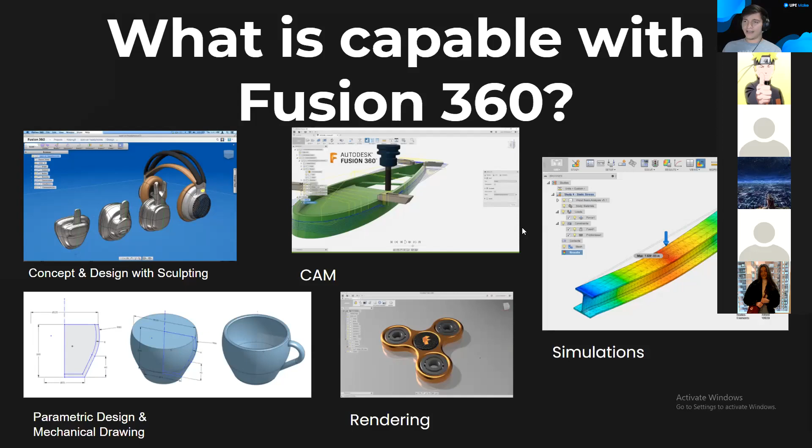But what we'll be learning today is the basics of Fusion 360. We're going to learn how to navigate the software. We're going to get some experience creating conceptual designs. And if we have time, we'll try to see if we can make an animation out of it, so you can see how you could create these animations, whether it's a prototype you're trying to show a company or a startup or things like that.

And as well, if you've ever wanted to learn how to export it to your 3D printing software, you'll be able to learn that as well. That's not too hard, it's basically just pressing a few buttons.

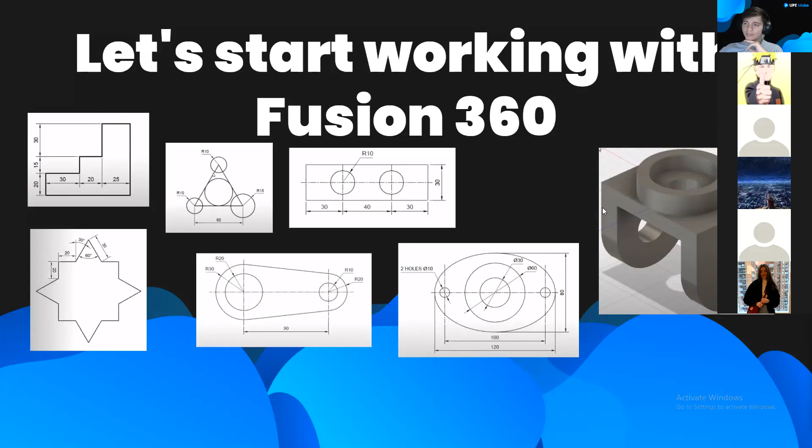But let's start working with Fusion. These are the different sketches we're going to make, and ultimately this will be the final sketch. We're also going to create a cylinder that could go through this little chamber, and we're going to see some really cool movement we could get out of the models.

For the first sketch, I do realize these pictures are not the best quality—I thought for whatever reason they were good when I was creating the workshop. I'll be sharing this PowerPoint document with you, so I'll fix these pictures so you could follow along through it if you want to refer back.

So let's go ahead and open up Fusion 360, and we're going to open up our first sketch.

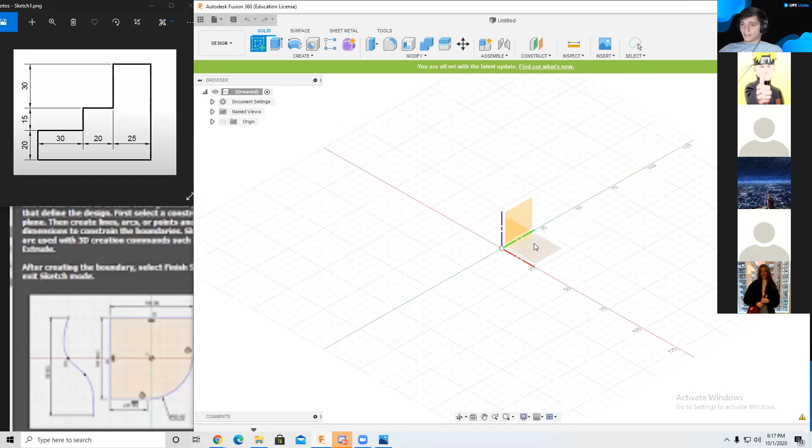What we are going to do first, before starting on the sketch, is play around with Fusion 360 and get a little comfortable with the different tools we have, as well as the navigation, so you could get a sense of how it works.

So just to have something to work with, let's go back. Let's go ahead and create a sketch. We're going to click on any of the planes—these planes basically give you your canvas where you're going to create the model and the sketch.

From here, let's go ahead and create a line and just put it anywhere—it doesn't really matter at this point. We're going to keep this one straight because I want to talk a little about the constraints. A cool feature with the line tool is that if you click on it and hold, it will create an arc. You could put this arc wherever; we're just going to hold it and put it back to the point we started with.

Before we go any further, let's review some of the navigation so you guys know what you're doing. So right now, if you hold your shift button and then your mouse button, you'll be able to orbit around the sketch.

It looks a little bit disorientating because it isn't a 3D model, but just so that you guys could see the different functions as well.

If you just hold the mouse button, you could pan and move the plane you're working with, and zoom in or out. The view cube does the same thing, so if you're not comfortable using the mouse button, you could always refer back to the view cube.

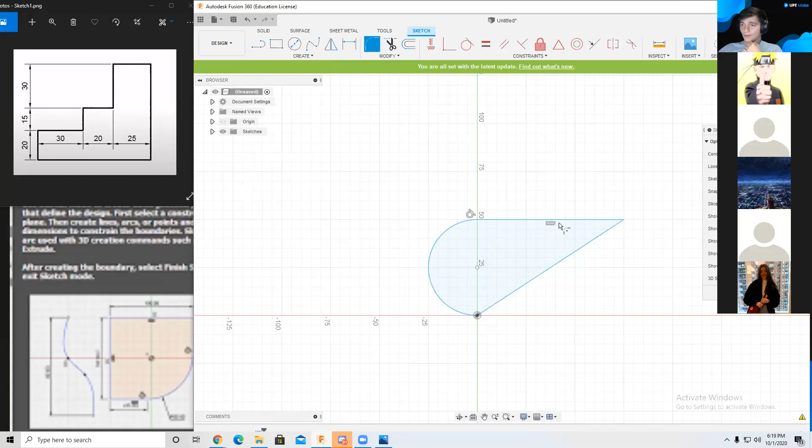You also have your modify tools if you want to make a fillet. If you want to fillet two lines and create a curve, you'd click on these two and it will create that curve for you. You could click on that arrow and it will show you the different measurements of the fillet you can create.

You also have your trim if you want to cut some lines off or erase them, and your offset if you want to copy what you've selected but change something within it, maybe make the arc a little smaller while still keeping the original one.

For your constraints, you have horizontal and vertical, like I said, the horizontal constraint. You also have coincident, where wherever you have a point, you can fix it to a line or another point within your sketch. And you have equal, if you want two lines to be equal - we'll showcase that here.

First, go ahead and click anywhere on the canvas and make a line. Whenever you make a line and want it to end, you could click the green button, or click escape on your keyboard.

From there, let's say we want to create a tangent between that line and this curve here. You would click on tangent, click on the line, and then click on the arc, and it will create that tangent for you.

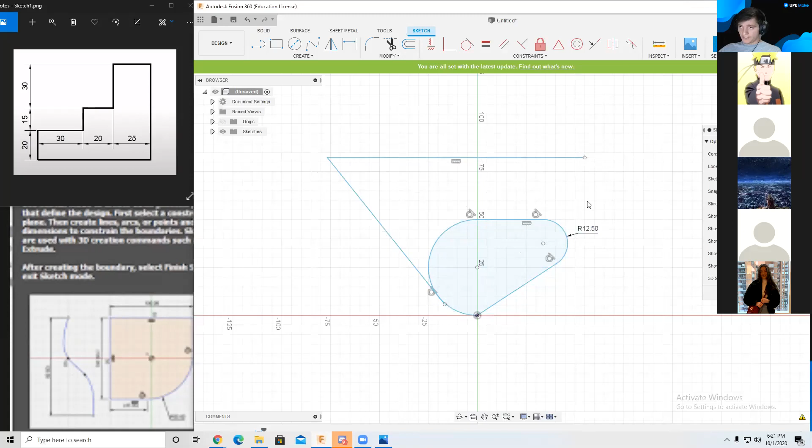From there on, you can't move this line anywhere. Now, if we want to create another line, let's click on that point and go all the way to the right. We could obviously see that these lines are not the same distance.

So if you want to make them the same distance, you click on the equal button and then click on the one you want to copy the distance from. In this case, we're going to copy this one to this one, and as you can see now, they're the same distance.

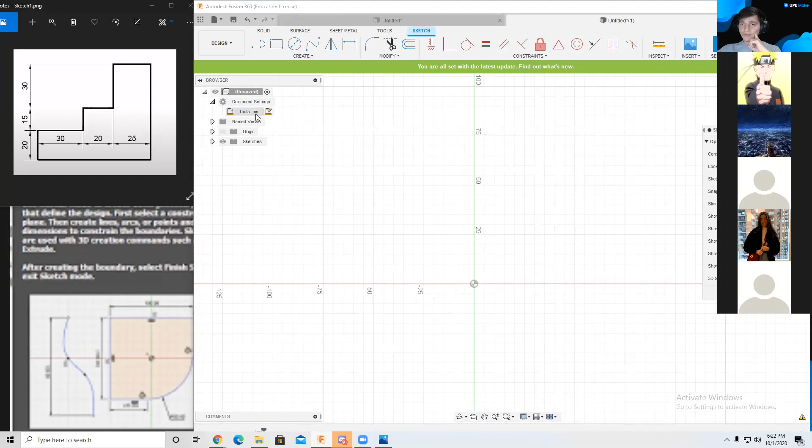If you click on document settings and it says inches, which I believe it does by default, go ahead and change active units and click on millimeters and set that to your default so that every time we create a new design, it's already going to be at millimeters and not inches. Okay, so it's pretty simple.

To start off, you're just going to use the line tool and we're going to create the general shape of what we're trying to create here. So we're going to go there, create that line, create the right line, and again we're just going to create the general shape. Measurements at this point don't matter. We'll go back and fix that after.

Now that we have the general shape, something to mention is that whenever you're dealing with dimensions, it's better to start off from where you began the lines, because sometimes when you try to change the dimension of, for example, this line right here, they'll go out and then they won't connect to the initial one anymore.

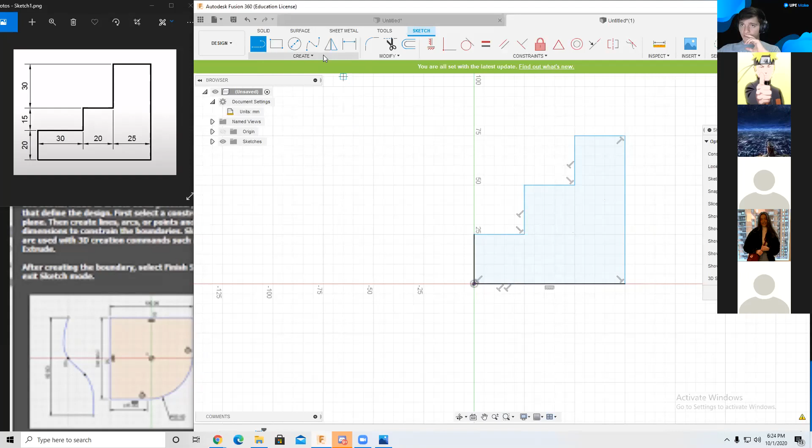So the tool we're going to use to create those dimensions with each sketch is the sketch dimension. You could use the shortcut of the D button on your keyboard, which is very helpful since we're going to be using it a lot this workshop. So to practice, if you want, just go ahead and click your D button, and then it should select the sketch dimension.

On the bottom we have 30 plus 20 plus 25, that's 75. So we're going to go ahead, it's already 75 because I got lucky, but if it's not for you, make sure to put that 75, then press enter. Then we're going to do the right side as well, which is 65. And then this side, 25 — looks like I'm getting lucky with these. This is going to be 20, and then this is going to be 30. If it's 30 already, then you're good.

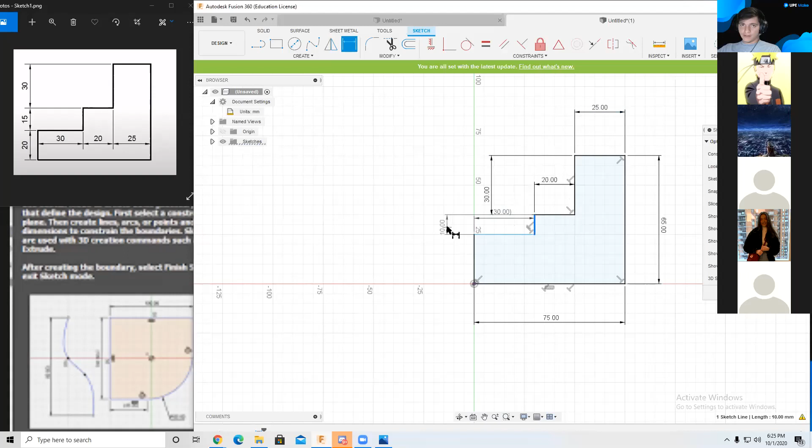And then we're going to do the left sides. So this is going to be 30, and this is going to be 15, and then this is going to be 20. Perfect, so now we created the sketch.

Now what can we do with this? One of the tools you use a lot in 3D modeling is the extrude method or function. This basically allows you to create the objects that you want to create. By clicking on that and clicking on the sketch or the face, you'll receive a menu showing the profile, where you're going to start from, the direction you're going to go, and the distance. In this case we're creating something, so it's going to be one-sided, and it's going to be the distance that we choose it to be.

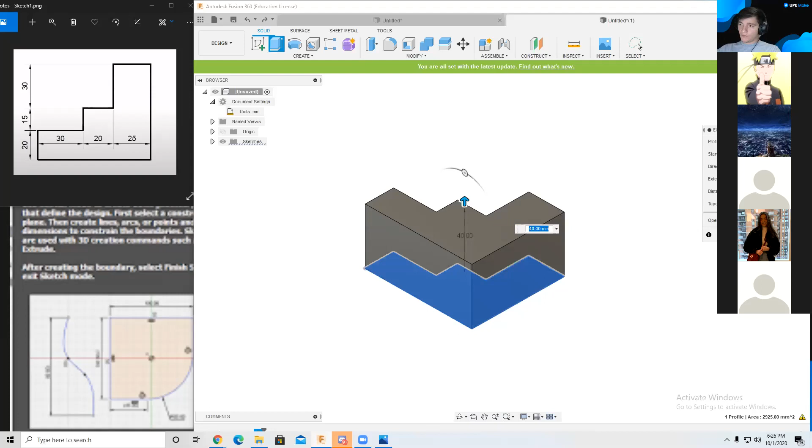We could go ahead and put it to 40 right now, just to show how that works. Before I continue though, let me go over the operations of the extrude. With extrude you get a few operations. The join, which means that whenever you're creating a new object from a sketch on top of an object that already exists, you're going to be merging those two objects together. Those are usually called bodies, but they can also be components. As you can see here, we also have bodies and components.

Before I get to those, let me explain cut. What cut does is basically create a hole in the model you're creating. And intersect — if you have an intersection between two models, it's going to either create that intersection or remove it.

But for now we're going to just go ahead and click on new body. What this is going to do is create a new body or an object that has its own plane. And that's the difference between bodies and components: components each have their own plane, bodies share a plane.

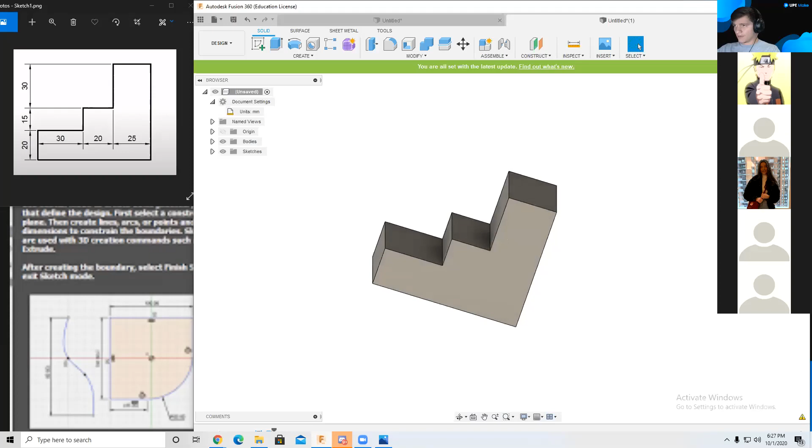So whenever you're trying to create objects or a model that has different parts that move, most of the time you're going to want to use a component, because each object has its own plane — it's a little bit confusing. Once we get to the workshop or to the different sketches, you'll understand a little bit more of what I'm talking about. But now that we have this, let's just go ahead and create another sketch so we could get a better idea of how that extrude works.

We're going to click on the centered diameter circle, click anywhere on that plane of the object that we created, and then we're going to finish the sketch.

We're going to create another extrude, and then where we created that sketch, we're going to show you these different operations. So if I create a body, on my left hierarchy, if I click on the bodies folder, it's going to show me those two bodies. So they're not really connected completely.

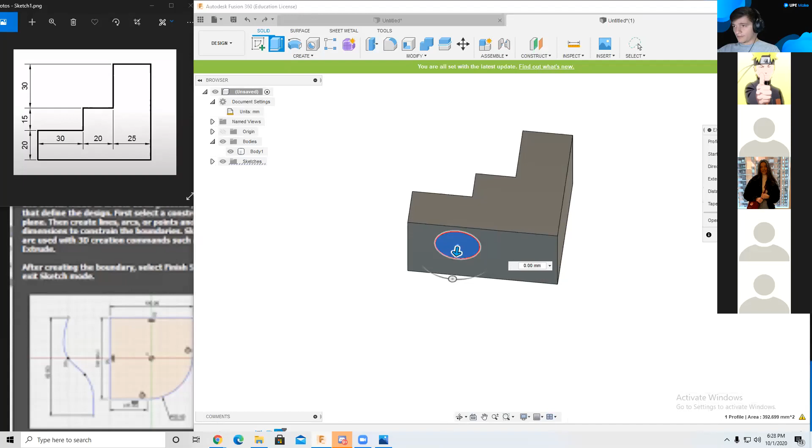They would be connected if I were to use the join operation. So now if I were to click on the join operation, there would indeed be only one body, and I wouldn't be able to separate these two objects.

And then the other thing, other than that, is the components. So for the component, like I said, they get their own plane. This allows me to move this out of the way. But as you can see, I can't move this one. The reason I can't move this one is because this is a body. Bodies have a lot more structure to them, which could be a good thing and a bad thing depending on what you're trying to do.

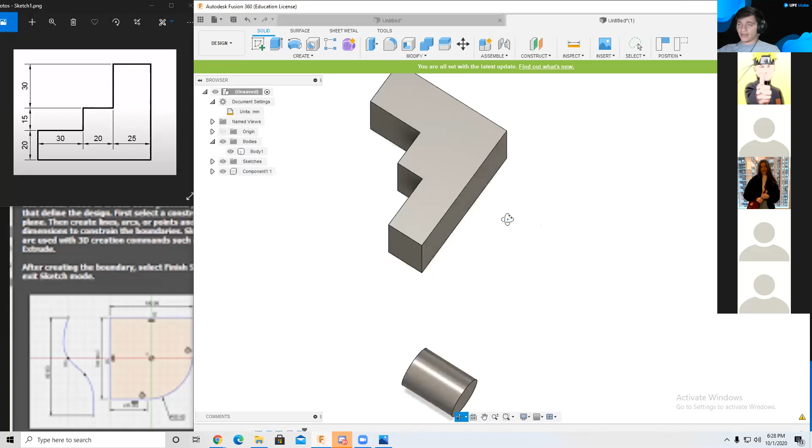In this case, the model that we created is basically stairs. Maybe let's say you were creating a tech deck park, and then you needed some stairs for your skateboard. That would be a way to do that. All right, so that's the first sketch.

Let's go ahead and click on new design. Let's go on to the second sketch. The second sketch is a little bit more complex. We're going to be creating a sort of star. We're going to be using the mirror functions, as well as creating dimensions of angles so you can get some practice with that. The way we're going to create the mirror is by making the top left section of this model, then using horizontal and vertical lines to mirror those over.

Starting off, we're going to use the line tool. We're going to click on the horizontal axis, and then we're just going to copy the general shape of that sketch. Make sure you do not get these two blue lines under these two lines as well, because that's going to create a constraint that we don't want, since we're not going to be able to give it the angle we want it to have. So just make sure it goes a little bit up, and then you can go ahead and click on the green button there.

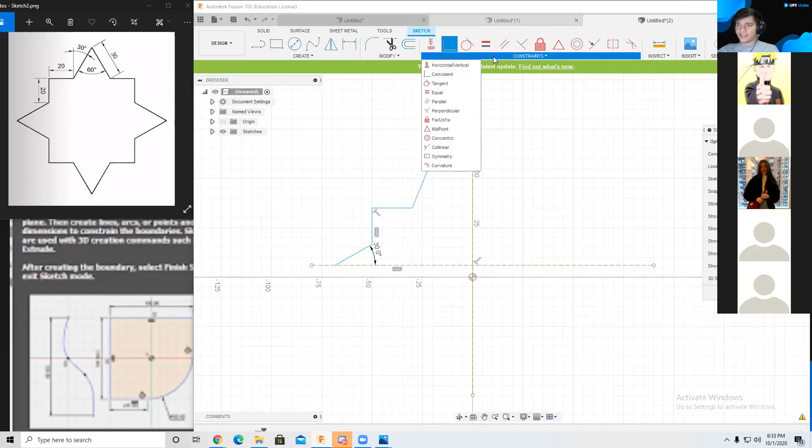Let's see if maybe some of you know how I would go about doing that. Yeah, it's not. So then what tool can we use again to put that construction line back on the axis? Coincide again? Constraint? It would be coincide again, yeah. So then for the coincide, we would just click on the line and then put it back on this point that is the axis.

And then how did you get that angle again? I'm sorry, the 30 degrees. Yeah, no worries. Click on sketch dimension, and we're gonna click on the line that we're trying to get the angle with, and the axis. Awesome, we're gonna click. Yeah, no worries.

So from there, now we have. We're gonna go ahead and give these two sides the length that they have here on the sketch, which is 20 and 20. So we're going to give that a length of 20, and this one also a length of 20.

Now we can't really give this an angle, so we're also going to use that coincide to move this back over here. Again, it moves the construction line, so we're going to do the same thing that we did and move it to the axis.

Now that we have it where we want it, we'll give those two lines that angle of 30. Did it give it? Yeah, it did. Okay, perfect. So now we got 1/4 of the design.

So now we're gonna go ahead and use the mirror tool to mirror that over to all the sides that we need it to go. So we're gonna click on the object that we're using. In this case, is these 4 lines, which are the objects, and then the mirror line is gonna be the one on the vertical axis. It's gonna mirror it over. We're gonna click OK, and then we're gonna do the same thing, but over the horizontal axis.

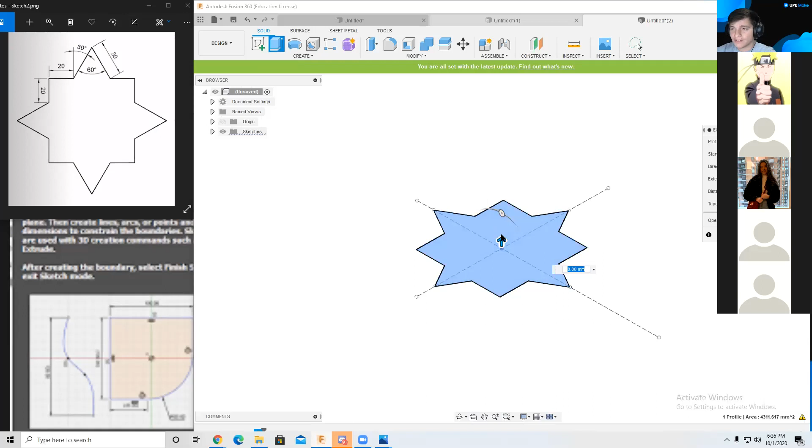So let's go ahead and extrude that. We'll give it some 20 millimeters. We'll create a new body because in this case, we're not using any other parts.

And then we're gonna use a fillet. The fillet makes it so all the edges around the object that we're using are smooth. So instead of clicking on every single line, in which case, some cases you are gonna have to do that, in this case, we could just click on the face and they'll do that for us. And then we could use this arrow key to kind of see where we want it to be, or you could also give it the radius that you want.

We're gonna go ahead and put a 7.5 millimeter on that. Click OK, and then we're gonna do the same to the other side. So we're gonna click the face after we click fillet, and then we're gonna give it a 7.5, and then click OK. So now we got pretty cool something.

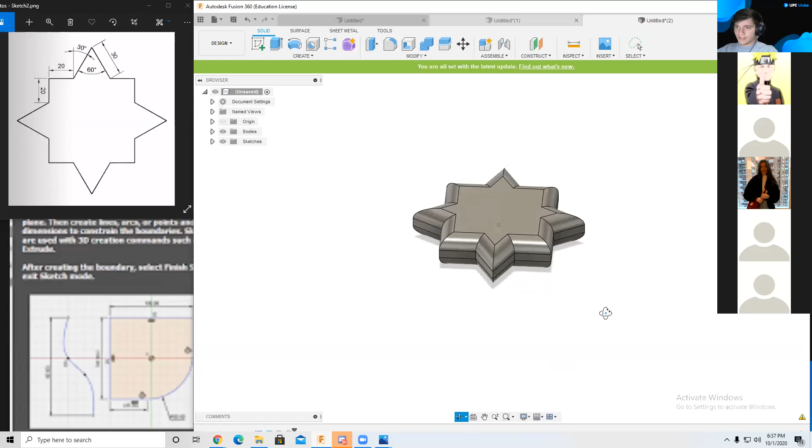But if we're trying to make a bracelet, then we're going to have to make a hole in the middle. And I would want to ask you guys which tool to use, but it's obviously going to be the one that says hole. So you're going to click on that hole feature.

You're going to click on the middle of the face, and we want to make sure that it is in the middle, so it should snap to the middle. Just make sure that it does go there, and then from there we could give it a little bit more dimension or diameter. But we don't want to go too far off, because then we're going to start getting errors due to the structural unsoundness of this design. So we'll just do 40 millimeters and click OK, and it'll make that hole within the model.

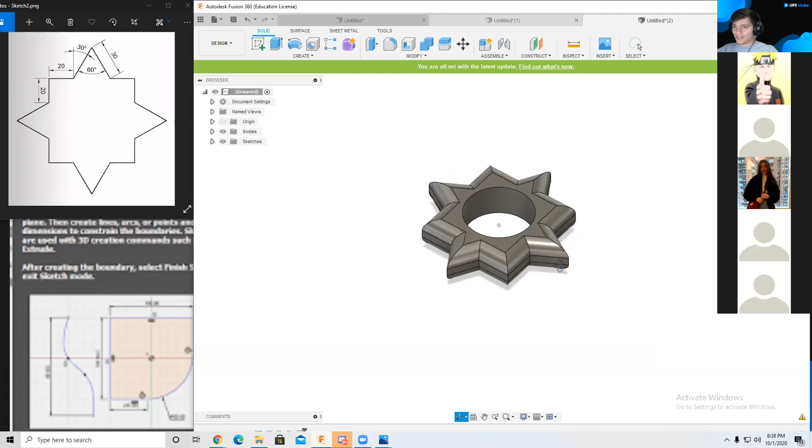But we wouldn't want to put that on our wrist if it has those sharp edges. So we could again use the fillet, or we could also use the chamfer, which is similar to the fillet, only with a straighter edge. We click on the two circles, click on that chamfer, and then we can use the arrow as well as give it the distance that we want.

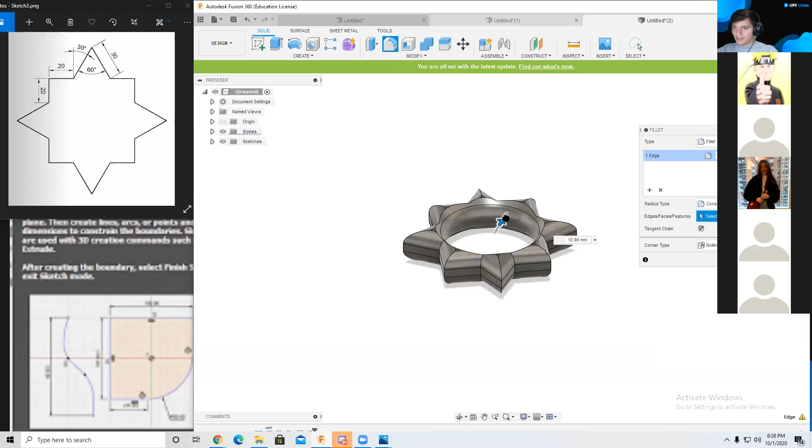Let's look at it. It's good, but I still wouldn't want to put that on my wrist. So we could click OK, and then we could probably give that line in the middle a fillet. And now it looks like something that we could use. So if you're into cosplay and you need to make some sort of bracelet like this that your character uses, this is a way that you could do it.

Cool, so that was the second sketch. Let's go ahead and start on the third sketch.

Hi, sorry, was there a way that you could make the hole not be a circle? Yeah, you just wouldn't use the hole option.

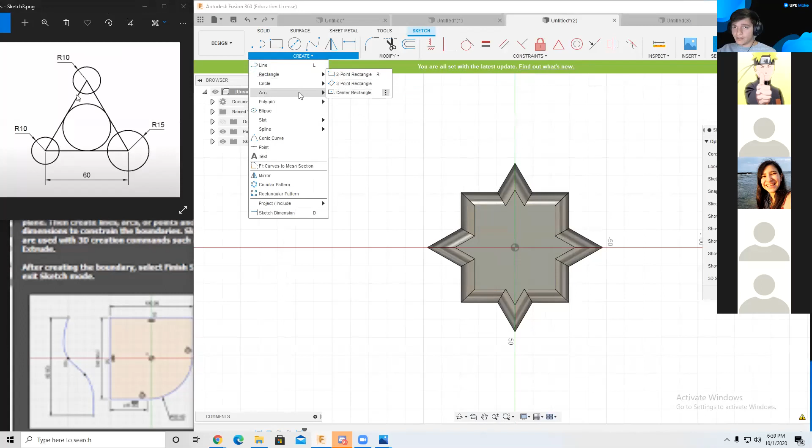You would just create a sketch on top of the face of the object and create whatever shape it is that you want to make. So you would click on create sketch and click on the face where you want to make the shape. Then, depending on what shape that is, you would go here, maybe a rectangle or a circle. If you want to make a triangle, then you would use the line tools and make that triangle yourself. Then just finish the sketch and extrude that out.

So once that's done—it would be the same thing if I wanted to do the shape that we just did, right? Oh, that shape? Yes, yeah, so I think you could actually extrude that with the shape that you already have there. You wouldn't have to make a sketch—you could just click on extrude and click there, and it would make it for you.

So as long as you see edges wherever your model is, you could do a lot of things with those shapes that are already created. Cool, thank you. No problem.

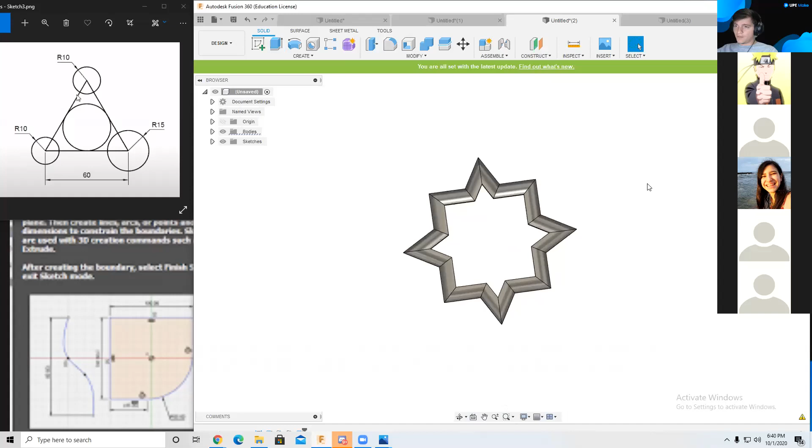Okay, so now for the next sketch, we're going to be creating an equilateral triangle with an incircle inside of it. So again, we're going to create a sketch, use the same plane that we've been using or any other plane, and we're going to use the line tool to create that triangle.

So we could start at the middle and then go to the right, then make sure that it meets in the middle and connect back to the first point. For this, since we want to create an equilateral triangle, we want to have the angle between two of the lines to be 60 degrees, because that's what creates an equilateral triangle.

So we're going to click on D, the sketch dimension shortcut, click on the two lines that we want to create an angle from, and give them 60. Now we want to make sure that the distance of this triangle is 60 as well, so we're going to make it a little bit bigger. From there, now that we have all the lines blacked out, it means we have a fully constrained shape.

We're going to go ahead and make those circles that we have here. As you can see, they say R10, R10, R15—those are the radiuses. But the way Fusion works, we give it the diameter. So in this case, for the bottom left, we're going to go ahead and give it 20.

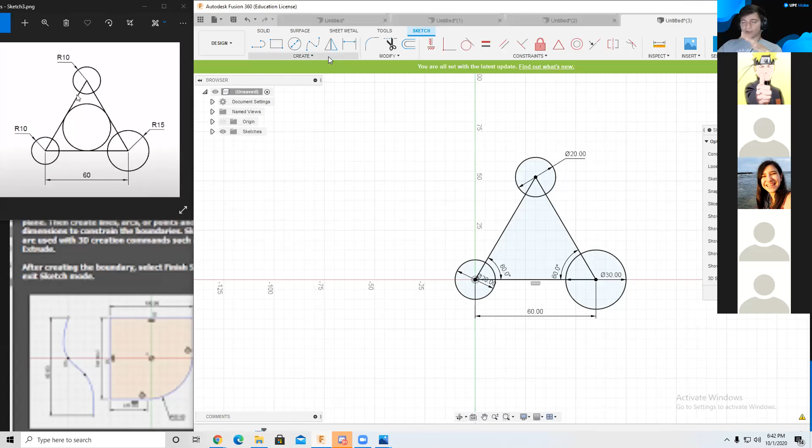So another question for you guys. We have this circle inside the triangle, and we want it to be touching every point of that triangle. I'm not going to show it so you can look at it inside your own Fusion. What tool or create function would we use to have that in the middle? You want to use some tool that creates a circle touching these three points. If you look at the circles available, which one would it be?

No idea? Okay, would it be like the conjoined one, so we want tangent? Yeah, I think the 3 tangent would work. Also the 3 point would work. Let's try with the 3 tangent. Yeah, perfect. You got it right.

So now that we have that sketch complete, let's go ahead and see what we could create with this. Oh, I forgot something. Once we have this created, there are lines here that we don't want, because if we keep those lines, it makes it a little more difficult to create that extrusion.

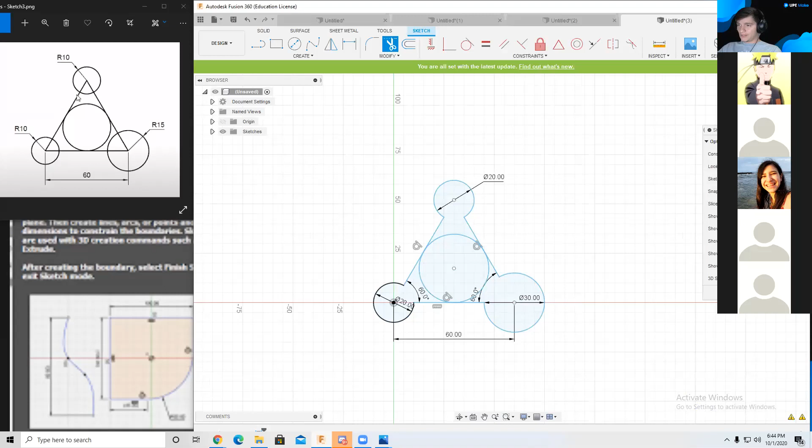So we're going to use the trim tool, or you could use the T key on your keyboard for the trim tool. We're going to trim all the edges that we don't want once we extrude this sketch. We'll keep the circle in the middle, but take away all the lines connecting the circles on the outside. The reason we want to do this, once we finish the sketch after removing those edges, is so we can create an extrusion that doesn't include this middle circle, but includes everything else.

Then we'll click on each one we want to extrude together, and we can create that shape or object. In this case, you could put 15 or 20. I'd say 15, because what I see here is a fidget spinner. The only thing wrong with this fidget spinner is that the walls are a little too short, there's not a lot of structure in there.

But you would do the same, something similar with the circle function. You would just make that circle a little shorter so you have a bit more structure within each side of the triangle.

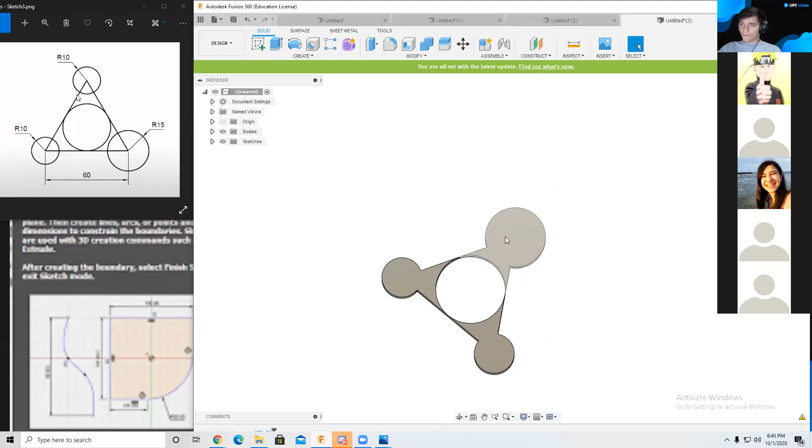I don't know if they have it, but check it out if you're interested. There's this really cool tool called McMaster-Carr. It basically allows you to have access to all these different nuts and screws, because in some cases when you're making different models, you don't want to create this stuff if it's already created. It's just wasting your time if you need to make it yourself. I don't know if they have bearings in here, but if they do, then yeah.

So you could go to McMaster. If you'd be interested in doing something like this, you go to Insert, McMaster-Carr component, and search bearing, or in any case you might want to search screws or nuts if you're trying to create something like that. Where would you go to get that again? Insert, and then Insert McMaster-Carr component. Then it shows you different things you have access to that you could import directly into Fusion 360.

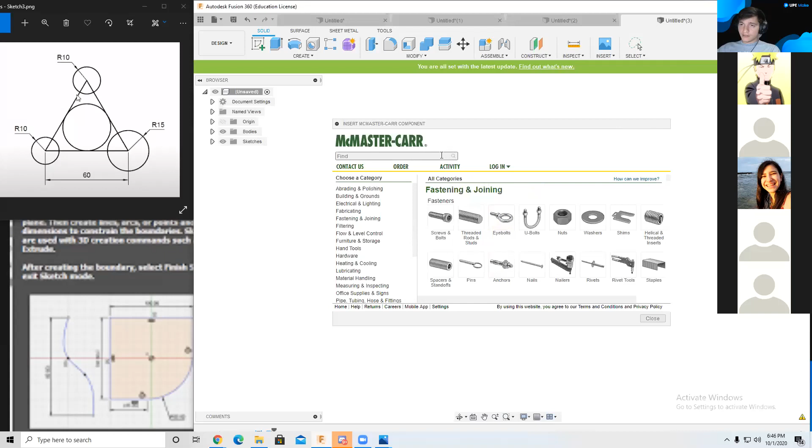In this case, we would use a bearing. I don't know how well this would work because of the size, but I think we could get it to work. Just go to bearings, click on open. Some of these don't have models, some of them do. I don't see any models for this one. But to show you what I mean in terms of importing these different objects, you could click on screws, socket head screw, alloy steel.

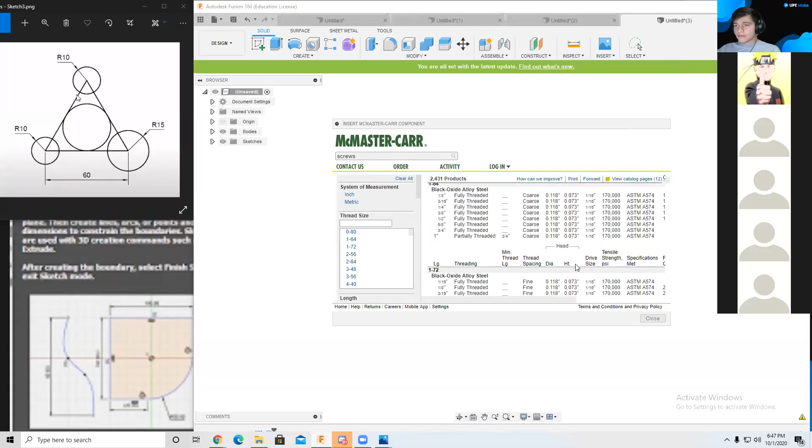And then we'll click on the size that we want. In this case it doesn't really matter, I'm just showing you guys how you could import this. Once you go to the product itself, we would go down. Let me see if I could make this bigger. And then you would click on save.

But first, I've heard from multiple people to always use 3D SAT, which I believe is the format in which it's getting imported into the model. And we have it here.

Then we could scale it if we would like to, with the modify scale. And equally, you would be able to do that with a bearing, but you would have to find what bearing is accessible through that import.

Awesome, so that was sketch 3. Hope you guys are following along.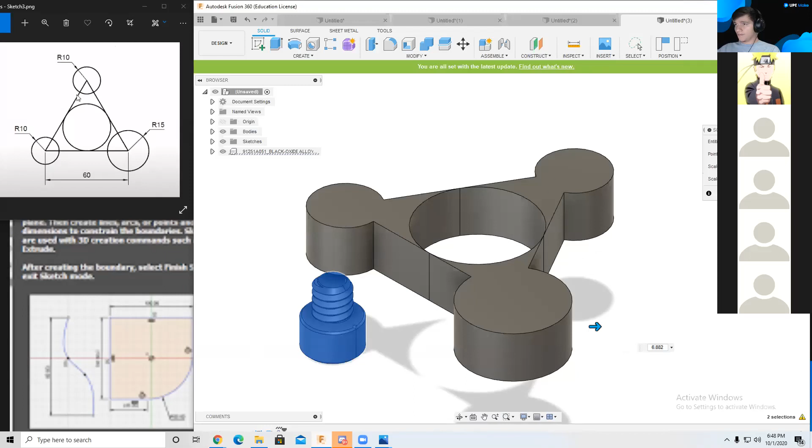If you guys need anything—hi, I got here late, but yeah, no worries. Oh sorry, that was private.

No worries. The way that we're doing this is we're doing it through sketches. So right now we're in the 4th sketch, so we have 3 more sketches and then we have the final sketch.

Just try to follow along, and I'll talk a little bit more in detail so that you could see what you're doing. If you don't have Fusion 360, make sure to download it, okay?

Quick question, you said this recording is going to be posted in the UPE YouTube channel? Yeah, that's correct. Awesome, okay thank you. All right, no worries.

All right, so sketch 4.

For a second I thought that the participant said 72. I'm like, what?

Okay, so this is the fourth sketch. The way that we're gonna go about this, we're gonna create a sketch as well. And then from here, what we're going to do, we're gonna have to first make those construction lines.

So you can see them in the sketch, those dotted lines. We're gonna create that, and the reason we want to create that is because we want to keep that measurement there so that we know where to put our circles.

So we're gonna click on the construction button, click on line, and then make some lines anywhere on the canvas. From there, we're also gonna create a line going through the middle. Click OK, or click create and continue.

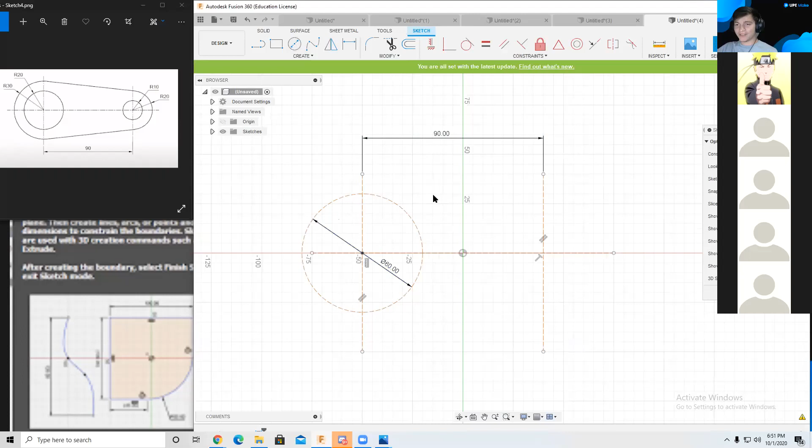Oh, this is a perfect error, so I could explain it to you. I forgot to click on this construction button again, so it made this circle a construction line, which I don't want because then I won't be able to extrude this. So I need to click on this and then click on that construction button here so that it creates a solid line for it. But once I deselect this again, it's going to still be selected, so make sure to turn it off once again so I can continue to create the circle where you need it to be.

I'm going to try to go a little bit quicker. It's only been an hour, but I don't want to keep you guys here too long, especially since I want to go over the 3D pen stuff.

So now we're going to give that a diameter of 40.

And then we're going to go to the right side and create those circles as well. So the outer circle is a diameter of 40 as well, and then the inner circle is going to be a diameter of 20. Because as you can see, it says R10, R20, those are radiuses, or radii, I don't know what you would call it, but.

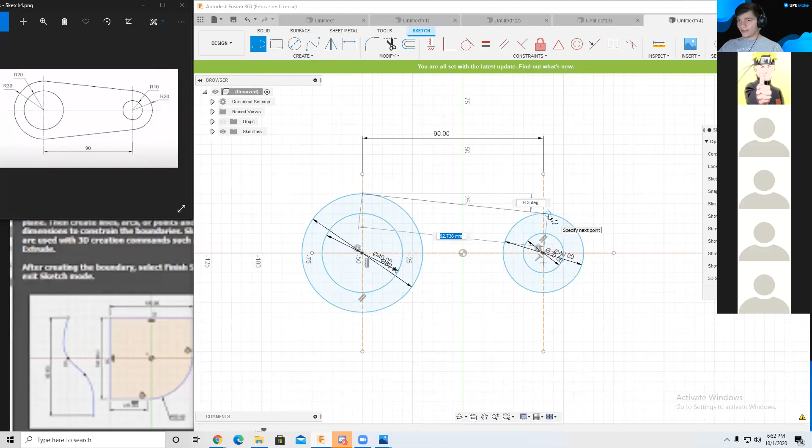So now we're going to create lines that connect these two circles. We could just click on the top right here and connect it here. What I would say is that when you are connecting these lines, make sure that the right side of it shows a tangent icon so that you know that it's getting that constraint. Obviously you don't have that constraint here, but we'll be able to add that constraint later on if we need to.

I might get an issue with this, but I know how to fix it. Click on anywhere on that circle, and make sure it goes to the tangent. Now we're going to give these lines tangents with the circle as well, clicking on the line we want and the tangent we want.

As you can see, I got a failure here. I believe that happens because the point where the line starts intersecting under the circle isn't recognized as a circle we can be tangent with. If that happens, click on it and then click the delete key on your keyboard to remove it. To avoid that, make sure to go a little bit over

that middle part of the circle, and then again put the tangent. Let's see if this works. There, yeah, that was the issue. It's probably going to happen to this one as well. Oh no, it didn't. Okay, perfect.

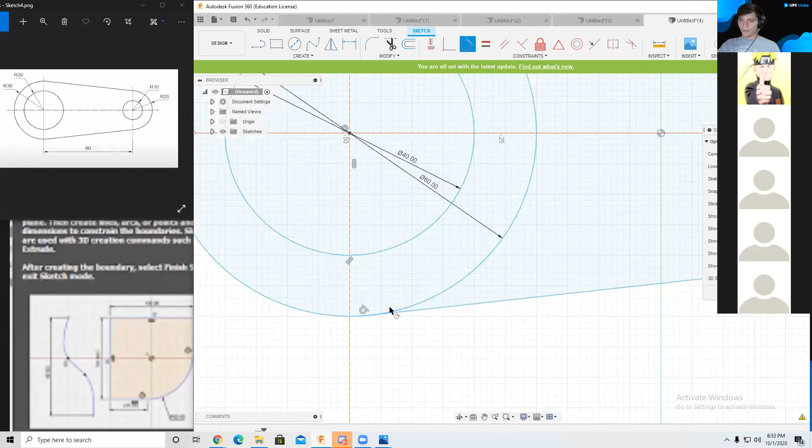The reason we want those tangents is so it's a lot more structured when it comes to removing these lines that we don't want, because as you can see in the model, we remove them. So now we're going to use the trim button and remove those lines from there and there.

One other thing to mention: make sure you zoom in really close on the intersections, because this line here that's separating this doesn't get removed, and that's going to be an issue once we start to extrude this model. Similarly, on the bottom, it's going to have that line we don't want there. Let's check this side as well.

This side is good, and this side is good. Okay, so we got the model.

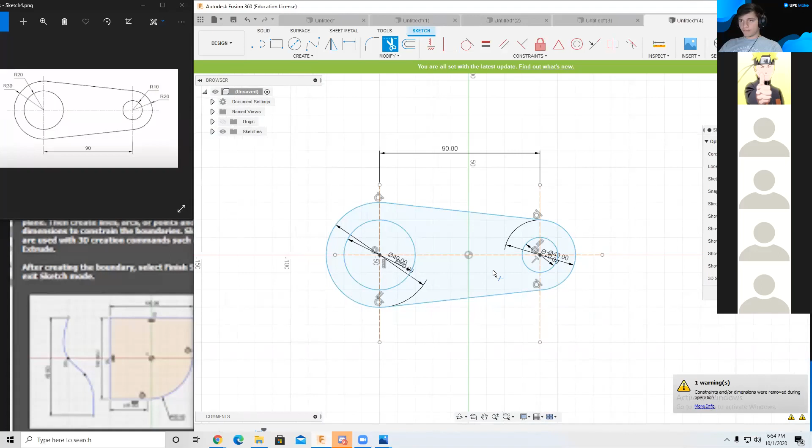Now we're basically done sketching it, so now we could extrude it. We're going to click on extrude, click on the face we want to extrude out, and give it, let's say, 15. And we've created a two-hole clip of some sort.

But what else can we do with this, right? I think we could do a few more things with it. So let's go ahead and create another sketch on top of it. I think there are two things you could make with this.

We're going to click on the line tool and create a line that goes from the smaller circle straight to meet the bigger circle. We're going to make another one on this side.

Since we've created these two lines that separate this part of the model, we'll be able to extrude that out or cut it out. So we're going to click the extrude button and cut this out. We use the operation and click cut, then tell it where to cut, using the arrow key to put it down, making that separation there.

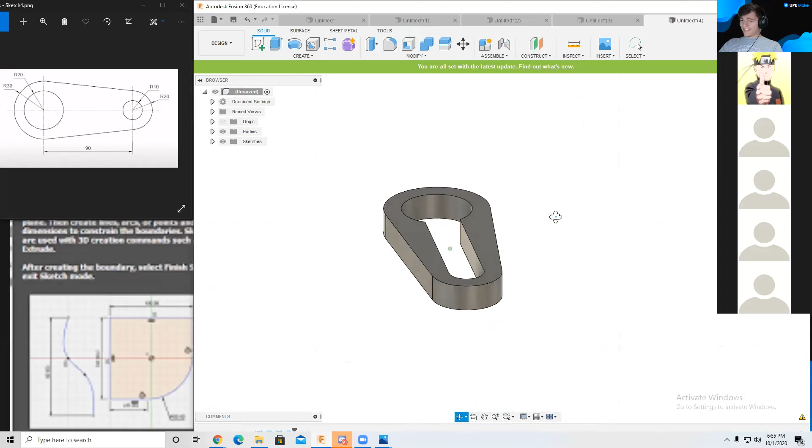Now, I don't know about you guys, but I think this is what they have behind the pictures you're always trying to frame on the wall. So if for whatever reason you lost one on the picture, you could create this in your 3D modeling software and print it out with your printer, or go somewhere. Kind of like a chain on a door too. Oh yeah, that too.

So now let's go back and do Control Z so that we go back to this view. We could also create the starting of what's known as, I think, one of those clip locks.

All right, this will be fine. So we created this sketch as well. I'll be really quick about this because it isn't really a big deal, but we also extrude this out.

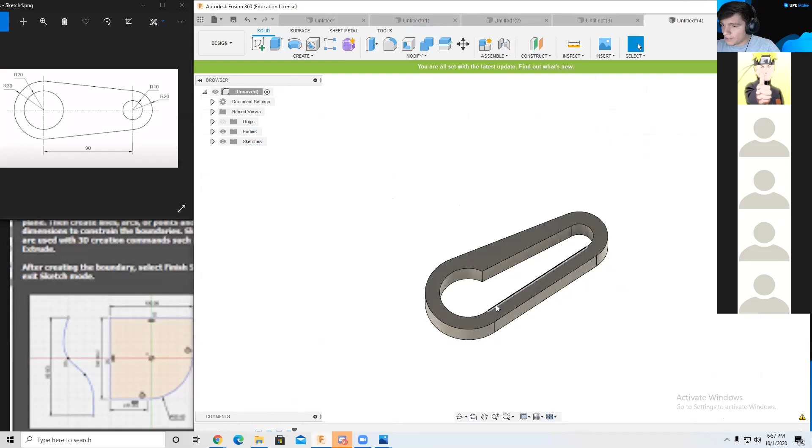Seems to me like the beginning of one of those clips that open and close on one of these sides. You would only have to create that mechanism to open and close it. But you could essentially create that yourself, or develop something like this and be able to

Create it if for whatever reason you want to. Cool, that's sketch 4, let's move on to sketch 5. And then we'll get sketch 6 and then the final sketch. These are a little bit easier, so it won't be too long. A lot of the same processes are for a lot of these sketches, but I wanted to ensure that you

Get comfortable with a lot of the tools here. Because especially for me, whenever it comes to a lot of the workshops that I've gone to, a lot of the content that's shown goes very quickly or very advanced. I think in order for you guys to get a better understanding, having you practice through these sketches makes it a lot more coherent in terms of how to use the software.

So initially we're going to create a rectangle, right? So we're going to create a rectangle, 30 by... was that 180? No, not 180, sorry. 40, 50, 60, 70, 80, 90, 120, right? I think so, whatever. So we create a rectangle at the center.

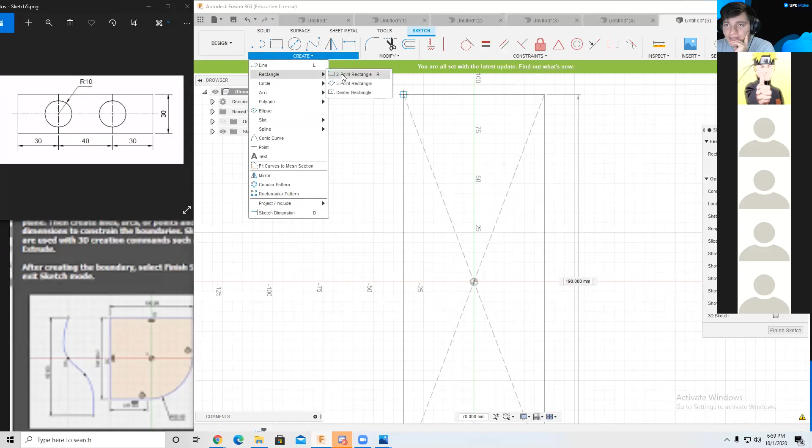Make sure to click on rectangle and then click on center rectangle. We're going to click on that middle part. We're going to create 30. We're going to click tab to go to the other parameter of the dimension. I'm going to give it 120. Oh, it's 100, sorry, I'm stupid.

I'm not stupid, I'm smart, but now we have those dimensions like that. You gotta keep reminding yourself, man. You can't. Gotta keep morale high. Yeah, exactly.

So now that we have the rectangle, we need to make construction lines so that we can make sure that the circles we create are symmetric. We're going to click on the line feature, click on construction, and create them anywhere on the left side, then another one anywhere on the right side. Once we've created those, we use the dimension tool to move those construction lines where we want them to be. In this case, we're going to give it 30 on the left side and 30 on the right side.

So now we have the location where we want the circles. We're going to use the center circle and click on those intersections. Radius is 10, so diameter is going to be 20. Oh, and looks like I made another error, but we'll be able to fix that.

Again, we're going to do it on the right side. But as you can see, these are construction lines, and we don't want that. So we're going to click on one, then click shift and click on the other, and make sure we deselect that construction toggle there. Once we do that, we basically got the sketch that we wanted. But now what can we do?

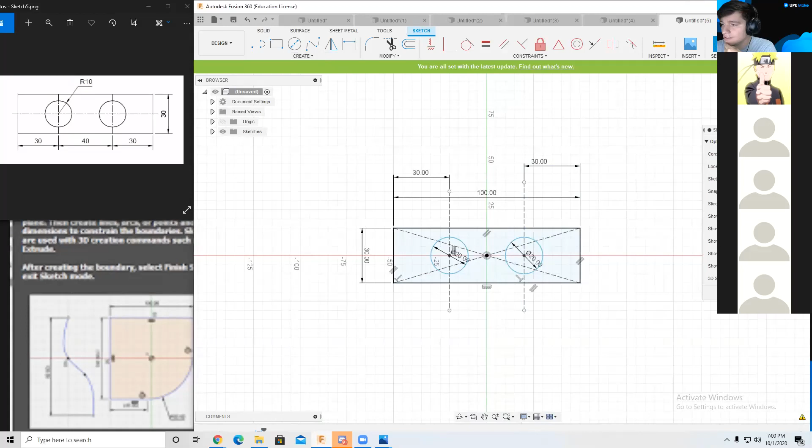So we're going to look at a new feature here, and that's going to be the loft. We're going to finish sketch, go to construction, and create an offset plane. The reason we create an offset plane is because what a loft does, as you could read here, is create a transitional space between two or more sketch profiles.

This is one of the sketch profiles. Since we want to create another sketch profile, we can't use it on this same plane because there's not going to be any distance in between. So then we're going to go to the construct tab, click on offset plane, and then click on the face that we're trying to offset. Once we do that, we can see that it created a plane for us.

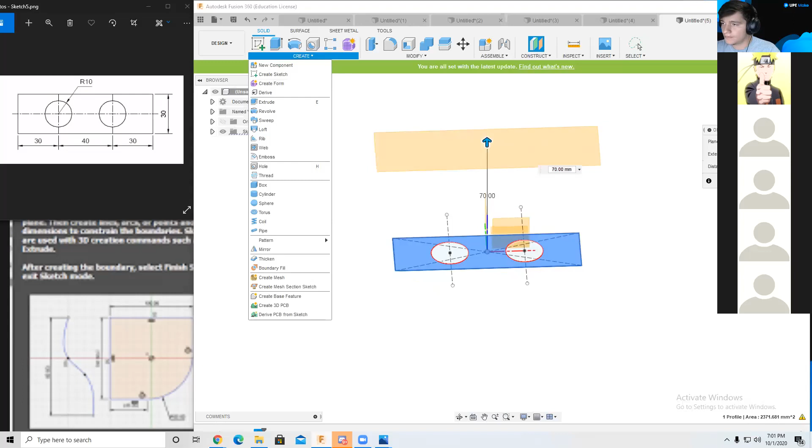We're going to move that up a bit so that once we create that sketch of another rectangle, we're able to create that loft and make that transitional shape. So we created that offset, moved it up a bit. Now we're going to create a sketch on top of that offset plane that we created.

We're going to make another rectangle, a center rectangle. And then we're just going to make it a little bit smaller than the outer rectangle we already have there. So we'll make it 20 by 70, that's fine.

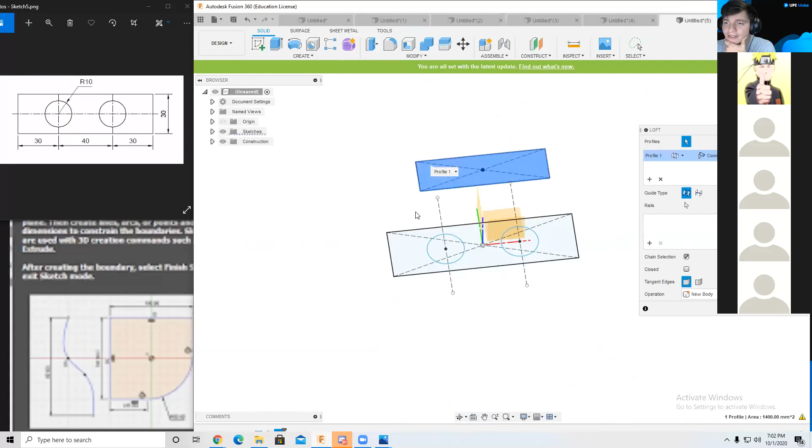So now if I move an orbit, you'll see that there are two planes separated from each other, and that's perfect for the loft. So now that our sketch is complete, we're going to click on finish sketch, then go to create and use the loft function. We're going to click on the two planes that we want to loft, and it's going to create that transitional space we were talking about.

Perfect. But now what? This is just like a block or a rectangular prism. And what happened to our circles? Whenever you create an object, for whatever reason, it makes your sketches go invisible. So to get those sketches back, on the left side click on the sketch folder and make sure the eye icon is on so you can see them.

And then again, we'll just create an extrude and click on both. You could either make a bushing, which is what this looks like, for maybe a door or some part of a car. Or if we were to create a join extrusion on both of these, we created some sort of Lego block. So you could get a sense of whatever your imaginary—whatever your brain could think of—you could basically make it.

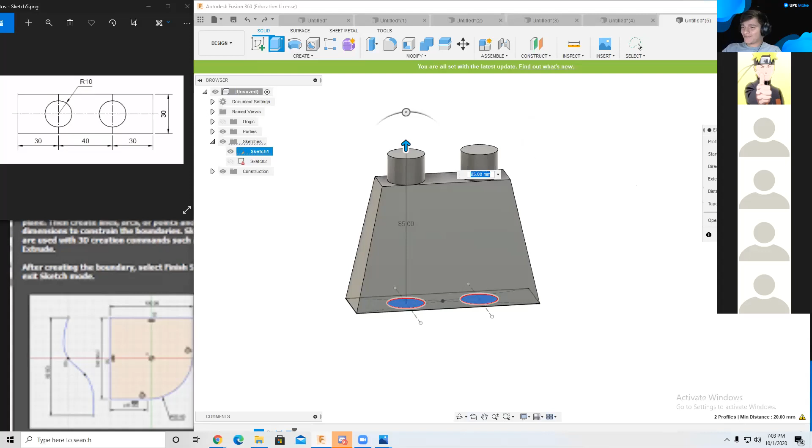So how did you create that shape from the sketches again? You use extrude, I think. The circles, or the way— you join the two planes, like the sketches. Yeah. So were you able to create the two planes? Yeah, I got them both. Okay, so then you go to create, and you click on loft. What loft does is it gets those two planars and creates the shape in between them. So you're going to click on one, and once you click on that option, you click on the other one. Got it, okay, thank you. Yeah, no worries.

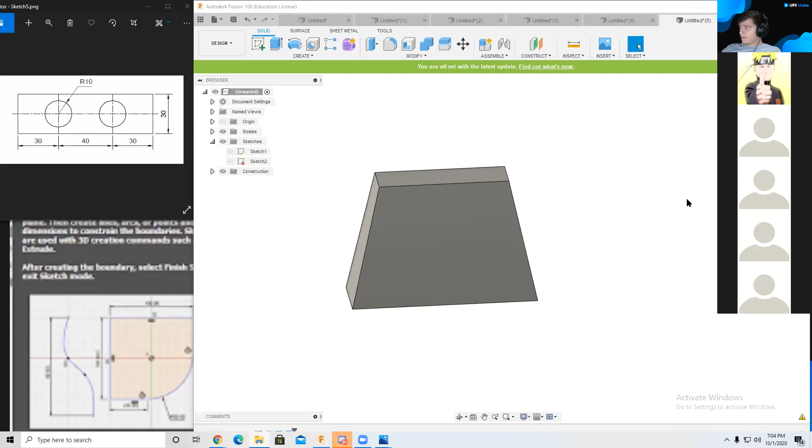All right, that was sketch 5. Again, like I said, you have your circles here. You extrude these and you create what it is that you're trying to create. In this case it would be a bushing.

We have one more sketch, and then the final sketch, and then we will get into the 3D pen. It's going to be a lot more chill once we get into the 3D pen aspect, because I'm going to be showing you guys my camera and me trying to create things like this, and hopefully you guys will be able to do it along with me.

So let's pull up the next sketch, sketch 6. Okay, again, create the sketch plane we're going to work on. In this case, we're going to use an ellipse. So we go to create, click on ellipse, and just click any two sides—we'll fix this after. One thing I did wrong right there: I want it to be in the center. For an ellipse, they're centered, so you start where you want it to be.

Now that we have an ellipse, we're going to make those dimensions what we want according to the image on the left. So the right side is going to be 80. Again, how I did that: you click on sketch dimensions and click on the two points you want to get that length from, and it changes the shape accordingly. Oh, that's not right. Click, click, what's happening? There. And this is 120, perfect.

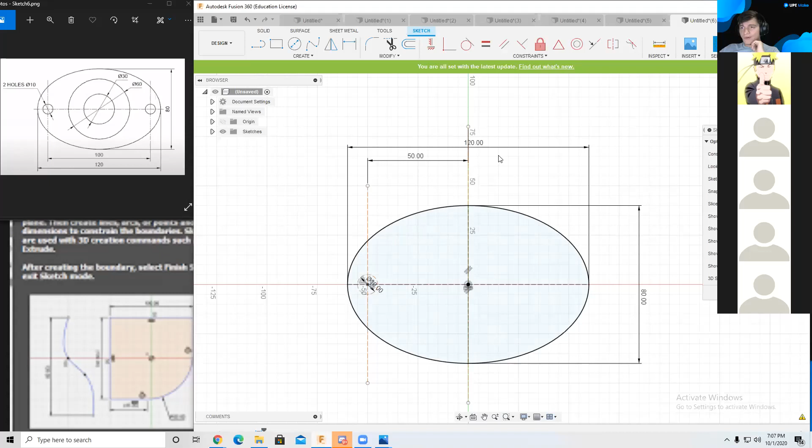So we go to that intersection and create the circle with a diameter of 10. But now we want it on the other side, so we use a mirror, since we have a vertical construction line in the middle. Oh, and again, I made this circle a construction line, which is a very bad habit, so you click on it and deselect that—make sure it doesn't happen again. Now that we create the mirror, we click on the object we're going to mirror over, then the mirror line we're going to use.

And there we go. So now the only thing left is creating the center circles. We're going to use that center circle again, create a diameter of 60, and then create an inner circle within that with a diameter of 30.

And we basically got our sketch, which wasn't too difficult. So now that we got the sketch, again, we'll go ahead and extrude.

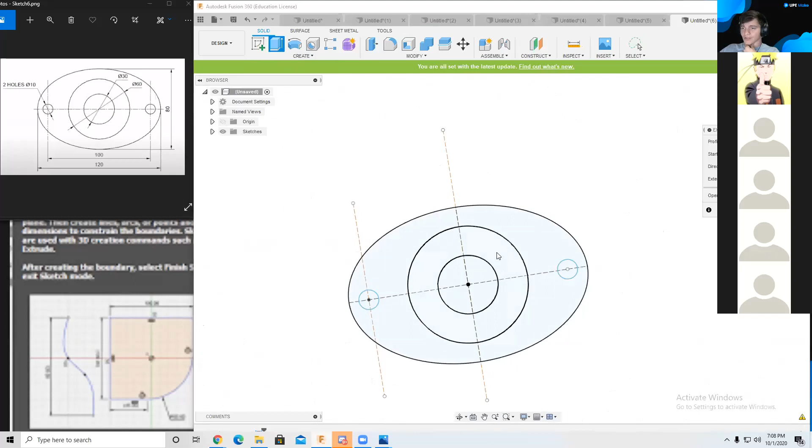This is going to be a little bit different because we are extruding different faces depending on what it is that we're trying to make. In this case, we're going to go on the outer face. We're going to click that first, and we're going to extrude that up by about 15 millimeters.

And again, the sketch disappeared. So we're going to go to the sketch folder, make sure we deselect that invisibility icon, and extrude again. Now we're going to do the outer circle, and we're going to extrude that a little bit higher than what we did for the first one, which was 15. So in this case, we'll do 20, or let's do 25. And we got our object.

Now, with every object and sketch that we've been making, I've been referencing back to what it may be. For this, I would say that this is the part of the door that you have where you have that metal part that comes out of it and locks the door basically. They're usually square, but I think some doors can come with this shape.

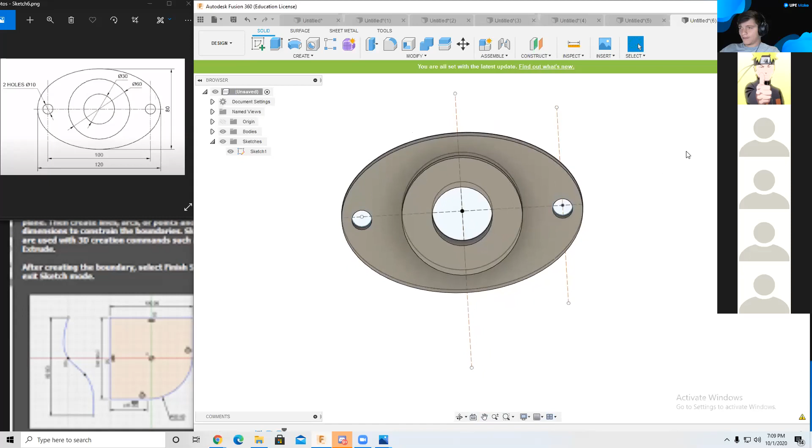And yeah, for the final design, we're going to create this sort of gimbal type of mechanism that has these two holes on the bottom where we could put a cylinder and then have it create some movement. And then maybe we'll get to the animation part as well.

So for this, again, we're gonna create the plane. This is a little bit different because we're gonna be doing it within separate sketches. So initially we're gonna first create the rectangle, then we're gonna create a sketch of the circle. So we're gonna go to center rectangle. If you look at the sketch, it says 80 by 120.

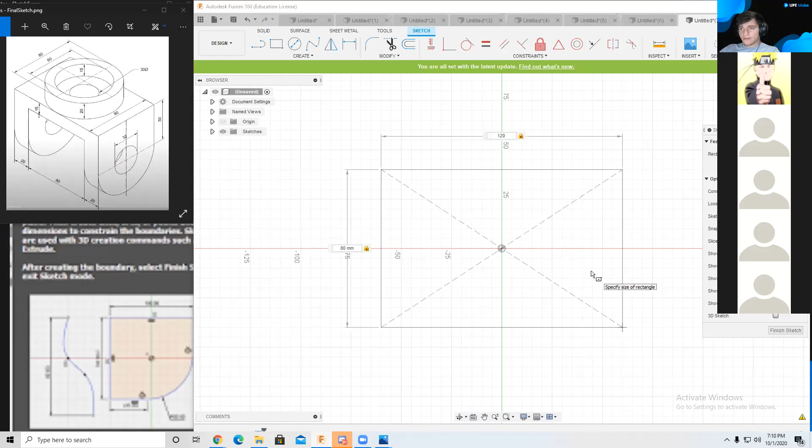Okay, so we finished that and we're going to extrude this. Now pay attention here, we're gonna extrude this by negative 15. The reason we do negative 15 is because since the plane is on this face, if we were to do positive 15, then the circle part of it would be a little bit off, or we would have to recalculate the dimensions that we're using. That way we're sure that this is still the zero part of the sketch.

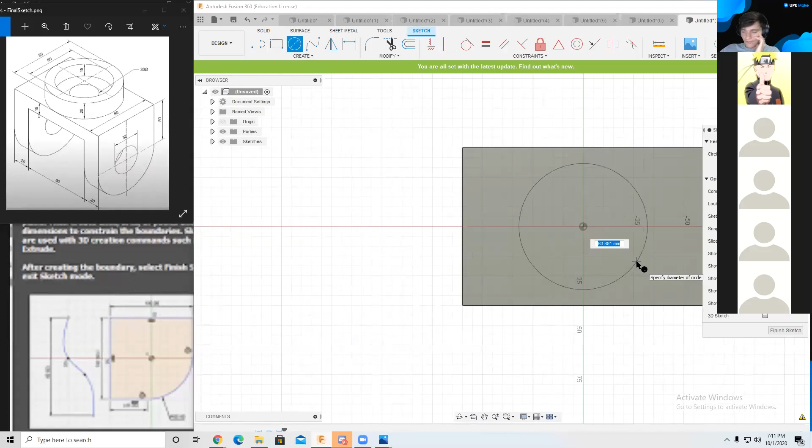So we created that rectangle. We're gonna create a circle on top of that plane. So you click on the face and it'll make that base a sketching platform for you. And then we're gonna create that center circle with a diameter of the big one is 80, so that's gonna touch the ends of the rectangle. From there, we're gonna create another circle inside, and that's gonna be a diameter of 60.

All right, so that's the sketch. And then, wait, did I do that right? No, I did not. Sorry, so first you create the outer circle. Once you create the outer circle, then you have to extrude this out. Realistically, you could have done it the other way that I was going to do it, but it might have been a little bit more confusing because of the amount of measurements that we have here.

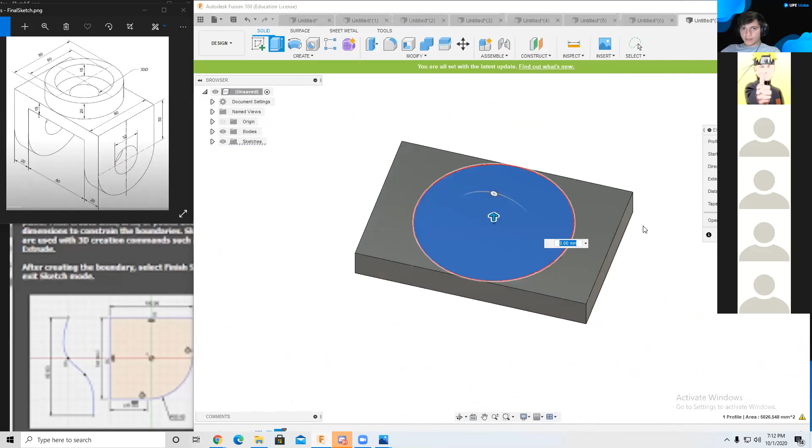So for this, as you can see here, it's a 20 length. So we're gonna put the distance of this to 20, and we're gonna create a join, so that is going to stick to this body.

And then again, we're gonna create another sketch on this face with a circle that's a little bit smaller. In this case, it's gonna be 60. We're gonna finish that sketch. Again, extrude this, but in this case, we're gonna be cutting it, so the distance in which we're gonna be cutting it is gonna be in the negative integer. So from this, we got 20 and we're cutting it by 15. So then again, we would do negative 15 and it would cut that amount.

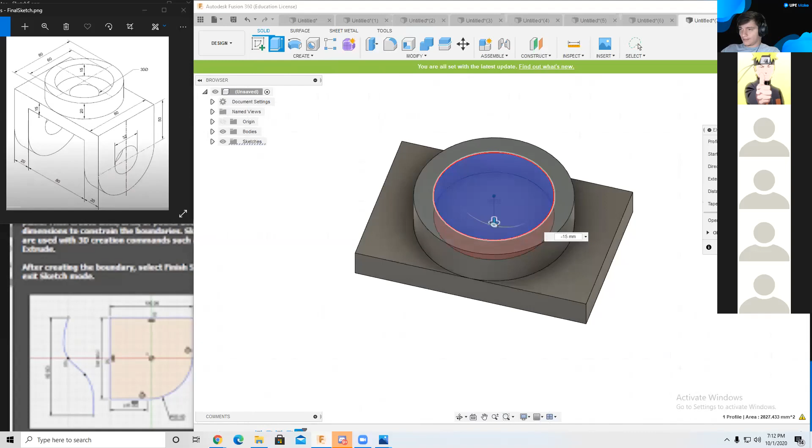And we got what we were looking for. One other thing is the last circle in the middle. So again, the sketch with that face specifically, a smaller circle inside. That one's gonna be a diameter of 30. And then we're gonna extrude that as well.

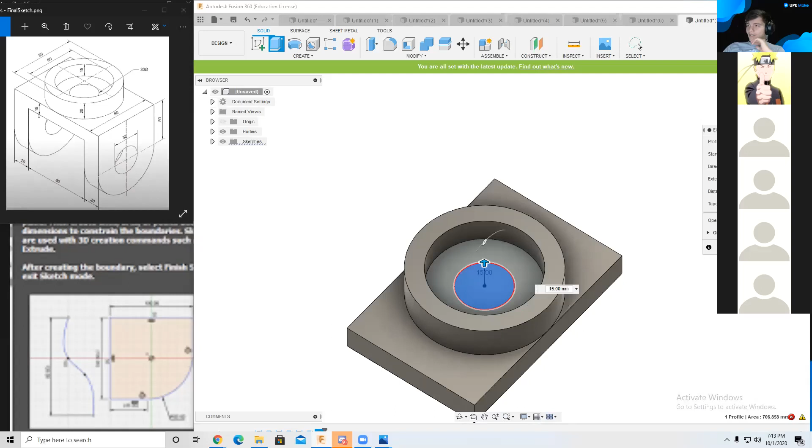The difference with this one is that we're gonna be cutting it, but we could use the extent, and we're gonna use all. Extent basically makes it so that you could either choose the distance you want it to cut or join, or tell it to go through all of it or join all of it. To the object is a little bit different. I believe the way that works is that if you have an object being intersected, it will take that portion and either cut it or add it there. But in this case, we're just gonna use all. And then we're gonna cut that.

The only other thing that's left is the legs, and we'll be able to use a mirror for that. This is the first time we're gonna use a mirror with the actual 3D object. It's basically the same, but there are a few features that you have to change.

So in order to create that sort of leg we want, we're gonna create the sketch on the right side of the model. Then we're gonna create a 2-point rectangle. The whole time we've been using center, but this time we're going to use the 2 point. The reason we do that is because we're starting from the corners, not from any middle.

As you can see here, this distance right here is 50, but we're not taking into consideration these 15 millimeters on the side. Since we started at about 15 down, we have to take this 50 and subtract it by 15, so the rectangle is going to go down a length of 35. And then from there, we got the rectangle that we want.

But now we have to create that circular sketch that we have there. So we could use the center diameter, click on the bottom middle of that rectangle, and make it touch all the way to the edge. And then we basically have that sort of shape that we want there.

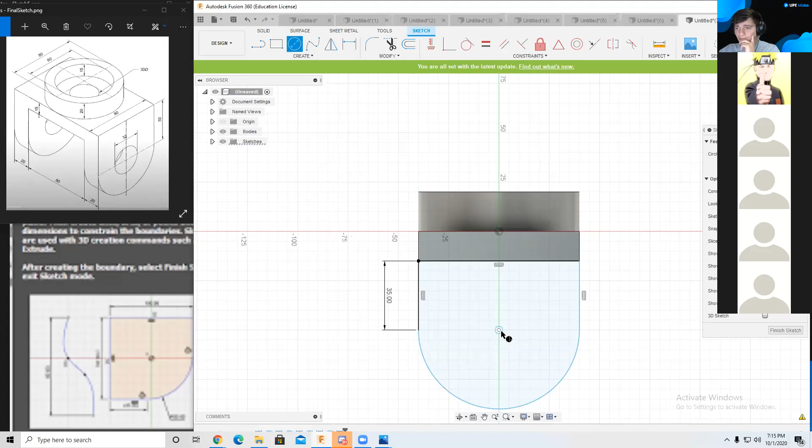But we have these lines that we can't have there, because the way that we would extrude this, it wouldn't include these lines here, only those, as well as a rectangle line. We can't have that there. The only thing missing here is the small center circle, which is a diameter of 32. And we basically got that leg.

We just need to extrude it now. As you can see here, it's going to be extruded by a length of 20 in the negative direction, I believe. So then we click on where we want it to be extruded. We're going to click on negative... oh, not negative 120, negative 20. And we join it.

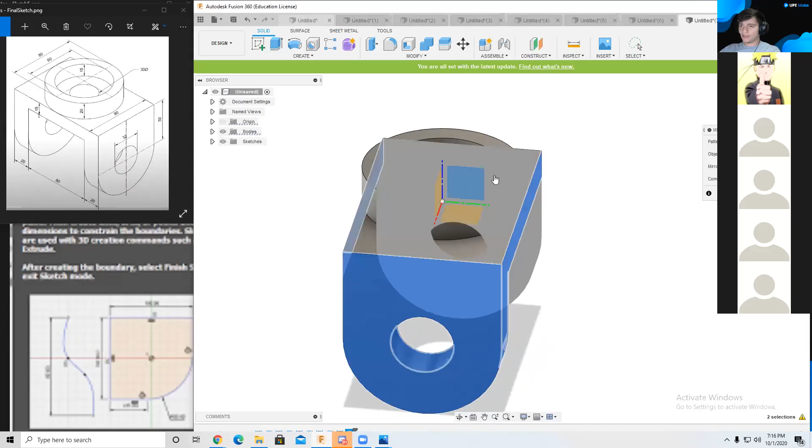Awesome, the only thing left now is to create that mirror. Similarly with the sketches, we're going to go to create, then down to mirror. For pattern type, we're going to click on features. By default, I believe it goes to faces, but since we're using certain features of the body, we click on the features tab. If we were copying the entire body, it would multiply or mirror the whole thing over, but in this case we just want this leg portion, so we click on that part of it. For the mirror plane, we're going to use the one that's across. And for the compute option, make sure that it's identical.

And there we go. So now that we have the model we're trying to get, the only thing left now is to create a cylinder that goes through these two holes, so that we can show you how we can use the joint operation or joint function and create some really cool movements with this model.

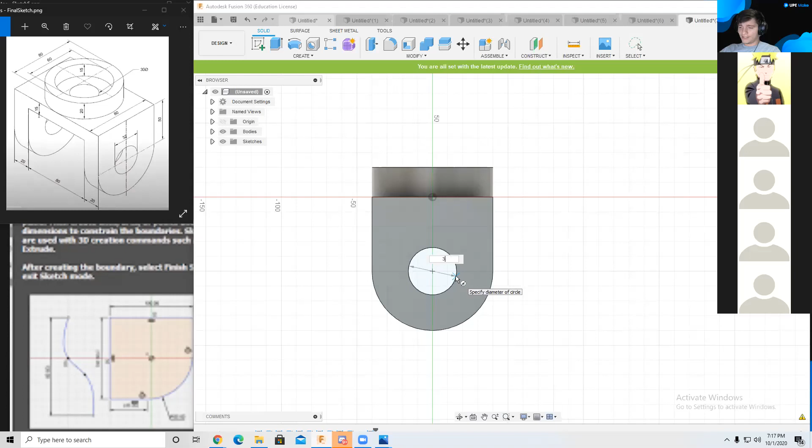So for that, we're going to click on create, then go down to cylinder. We're going to click on this face since we are doing it according to this diameter, but it doesn't really matter as long as you make sure the diameter you place that cylinder is 32. Then in terms of the length for this cylinder, we're gonna want to make it a little bit big, so I'll do 150, so we can show you how it moves through this transition.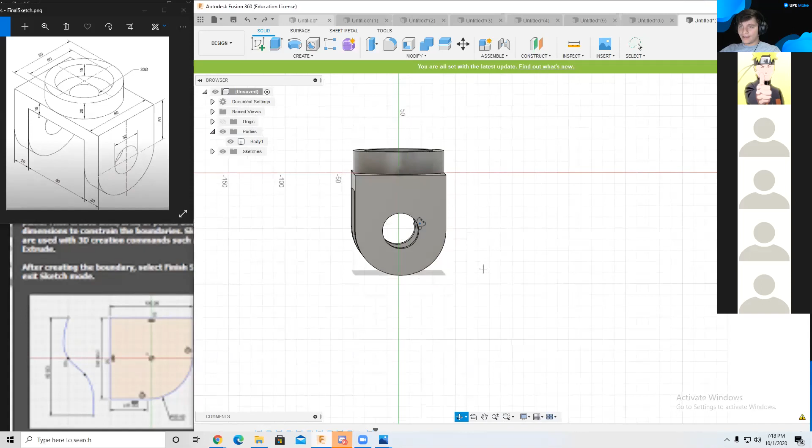But like you can see here, you might have to press Control V for this one. I forgot something, so let me tell you what I did wrong. I forgot to make the cylinder a new component, so because I didn't make it a new component, it's stuck. I can't move it, it's a part of this body, or it's its own body but it has the same plane as this body, so that means I can't move it. So in order for me to have access to move these two bodies, first when I create that cylinder, I need to make sure I create it as a new component instead of a new body. And you'll see what I mean.

So again, 150 millimeters, new component. Now it's going through it and I have the ability to move it. But I don't have the ability to move this one because this is still a body, and this is going to be an issue because I won't be able to show you the movement from the joint operation. So we need to click on the body folder, click on the body, and create a component from the body. This makes it so it has its own dynamic plane that isn't grounded. So now I can move this as well.

From here, the only other thing left is creating that joint between these two models. If I click on joint, it's going to come up with this pop-up. Just go ahead and click on capture position. Then we want to let Fusion know where it is that we want that joint to be. So we're going to click on the middle of this cylinder part, and then click on the middle of this object as well. And as you can see, we get that movement there, which is pretty cool.

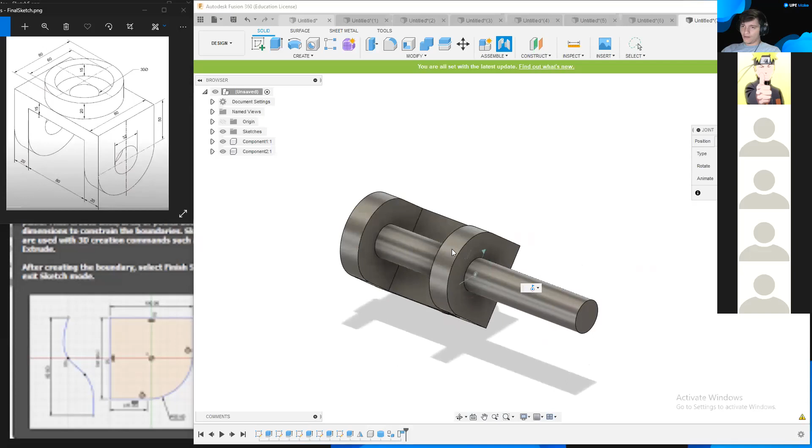But that's not the only movement. We have a lot of movements depending on what it is you're trying to do. In this case, we have a cylindrical object, and we have a slider, a revolute, or a cylindrical joint, which is the one we're looking for. And yeah, that's basically it.

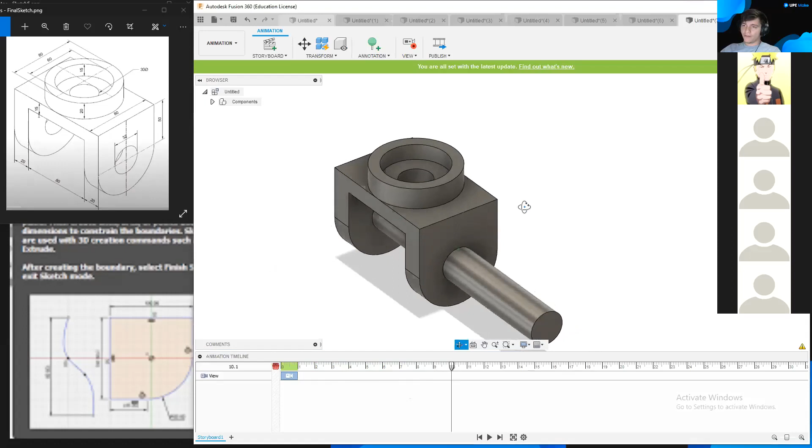The only other thing left would be to show you how to do an animation, so I'll show you really quick. For the animation, you click on design, then click on animation. The way animation works is it goes in keyframes, so you have to click on the keyframe where you want it recorded. I clicked on 10 keyframes. Whatever movement I do now is going to be recorded. So I'm going to pan, or orbit. Now that I orbited, it recorded that.

But I also want these objects to move. So if I click on one of them, I might do this wrong because I've been having issues with this, but I believe if I click on this and then click the M button for move, the pivot is set, so it's recognizing this as a pivot. Let me see if I can do it with this. Yeah, I've been having this issue. I don't know what... okay.

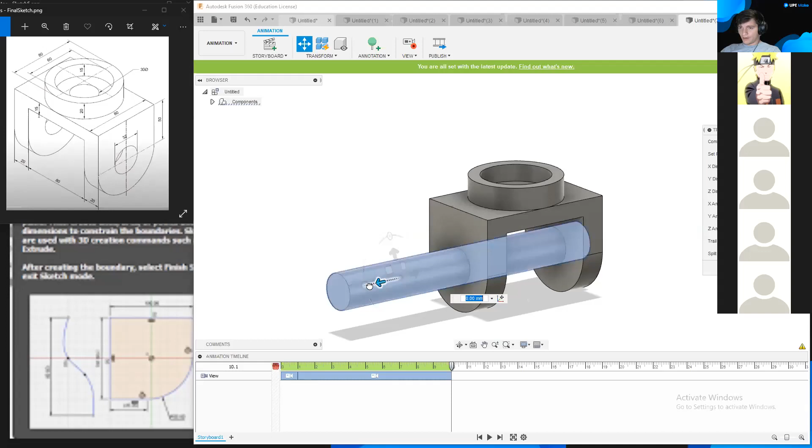So now that I got it to move, basically that movement that I made would be recorded. And there we go, so it was recorded.

But I also wanted to rotate. Yeah, actually I'm not going to be able to show you guys this, I'm having too many issues. But let me show you what I created from that little segment right there. So if I go back to here and press play. What the hell, it's not doing anything. Okay, well that's unfortunate. Oh, there we go.

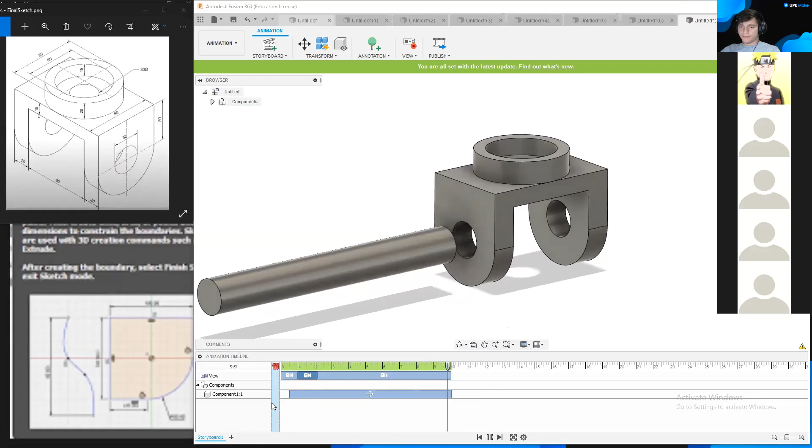So essentially you would be able to create that movement and also have this rotate, which would be really cool. I'll show you what I mean with another thing that I created, and then I'll also show you some stuff I've done before, that I've modeled before.

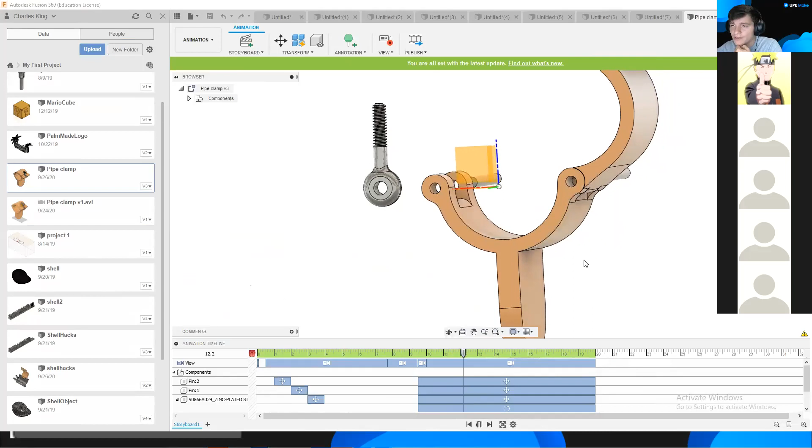So what I mean by the video, this is the video I'm talking about. It's a little bit heavy, but this is something I created from this model. You create the motion, you could move all the components, and then once you have the camera move as well and put it all back together, it's super sick.

But yeah, I don't know what happened. Were you the same one that did the workshop for ShellHacks? Yeah, I remember this, yeah I remember this. It was pretty cool, yeah. I don't know why it's not working now, but that's basically the type of effect you're going to get out of it.

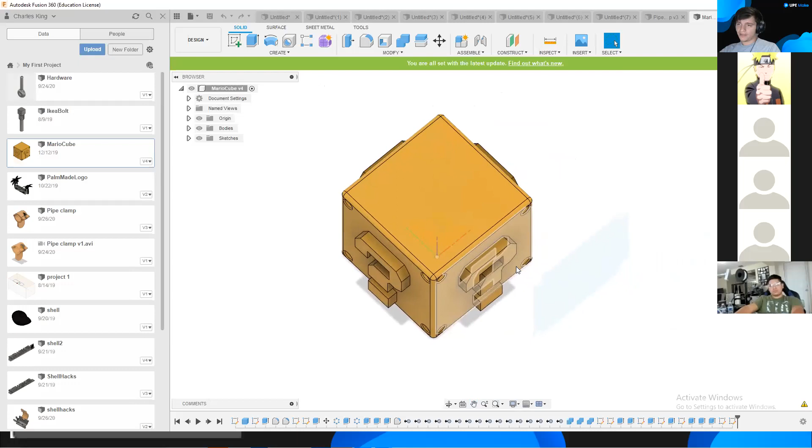For those that weren't at Shellhacks, this is one of the first workshops they did for UPE Make back when I was a member, and this is what they created. Hopefully with some of the knowledge you gain, you might be able to create this. For these question marks, you could mirror them over all the sections using the circular pattern method, so it copies it all over, and then you just have to join it to one object, and there you go.

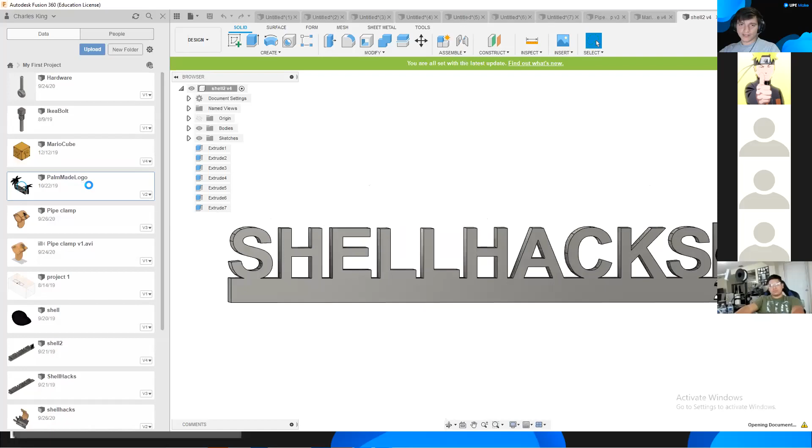But also for Shellhacks 2019, I created this, which is pretty cool. I also printed it, you could probably look at my Instagram if you want to check that out. I did a time lapse as well, which is pretty cool. I'm also creating this for a friend of mine who's a barber, he has this company called Palm Made. Obviously I didn't make these trees or the scissors myself, I got them rendered, but it's sort of an idea of the type of stuff you could create with this.

Did you get them from McMaster-Carr? What is it, the car? No, I think I downloaded them off the internet. I forget where exactly, but I don't think they have scissors in McMaster-Carr. But you could check.

I had a question - are you able to scan in an environment or an area so you can work off of it? For example, scanning the dash of a car, and then using that to make a piece. I don't know how easy or hard it would be, but it is possible. There's this camera, and I think there's some applications you could look into for your phone that allow you to record objects in real life and transfer them to the 3D modeling software you're using. So it's definitely possible, but you'd have to look more into the applications.

One of the things we have in the space, obviously it's not open right now, is this attachment for the iPad that allows you to create 3D models from images. I was just wondering because they have LiDAR sensors on the new iPad, so I was wondering if I could utilize that. Yeah, I'm pretty sure you can - I'm not super familiar, but I believe so. Okay cool, yeah no worries.

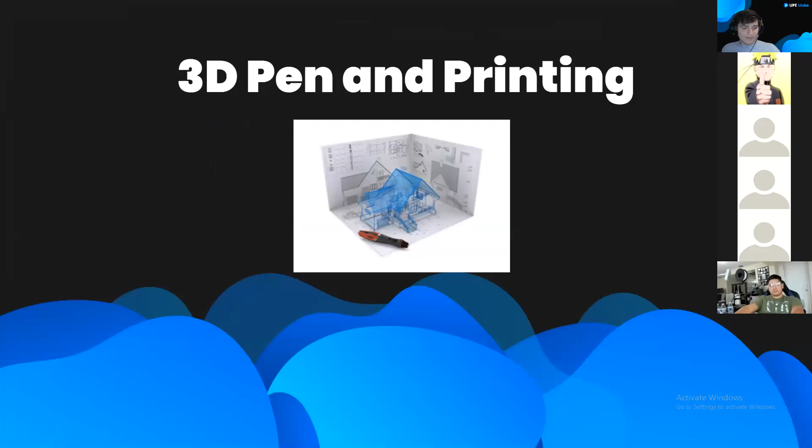Now we're going to talk a little bit about 3D pens and 3D printing. You guys don't have to be here if you don't want to, this is optional additional content. It's already been an hour and a half, but if you guys want to stay and try to create some of these really cool prints, you're more than happy to. We're going to cover what a 3D pen is, some of the filaments that are available, some of the 3D printers that are available, and the different types that there are.

Unfortunately I don't have a pen, so I'll be heading out here. But I really appreciate the workshop, it was really cool, I learned a lot. Yeah, I'm glad, I'm really happy about that, no worries. Yeah, me as well, I'm out. Thank you. All right, no problem. I'll see you guys, have a good one, man. Take it easy, bye.

3D pen printing is the process of building a three-dimensional object using a pen that uses plastic or filament.

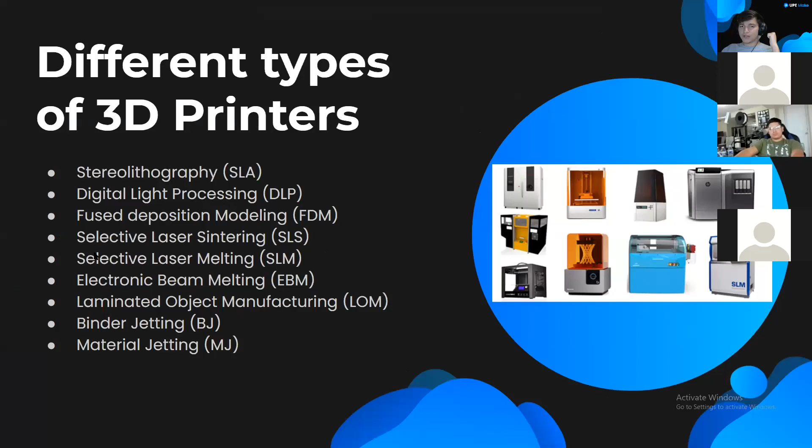Some of the different types of 3D printers there are: there's stereolithography, digital light processing, fused deposition modeling - which is the one I have behind me and is the most common one with the nozzle and all that - but there's also selective laser melting, beam melting, and other types of technology.

To go a little more in depth into the more popular ones, stereolithography technology basically uses an ultraviolet laser to heat the liquid you're trying to use to create that model. It's a lot more complicated than that, but basically you heat the liquid so it becomes a solid. It's not like these where it's a nozzle and you're heating the plastic - it's a liquid that you're creating into a plastic, instead of a plastic that you're creating into a liquid and back to a solid plastic.

The fused deposition modeling works by building up layers. It goes from one layer to the second layer and builds up from there, using the heating and extruding of the filament to do this.

There's a lot of filament types. I'm only going to name a few, but the most popular ones are ABS filament and PLA. ABS is a lot stronger, but the one most people are familiar with is PLA. These filaments are super cheap to get—you could get a roll like this for maybe 15 bucks.

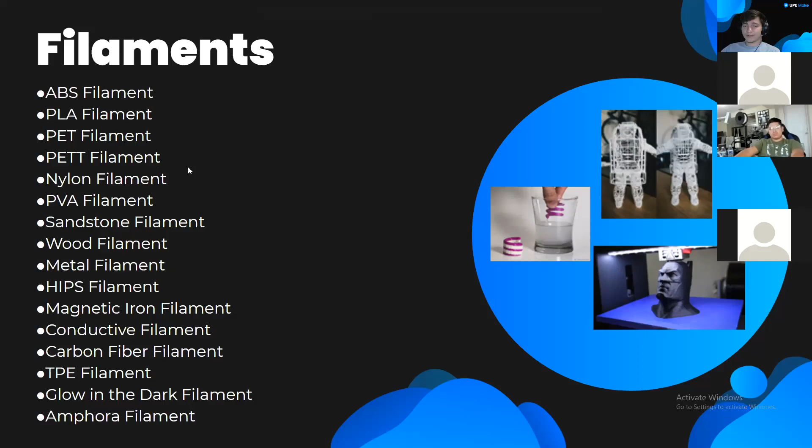That's kind of why I wanted to do this 3D pen portion of it. 3D printers are pretty expensive, so the next best thing is having a 3D pen. That's why we're gonna demo it a little bit and play around with it today.

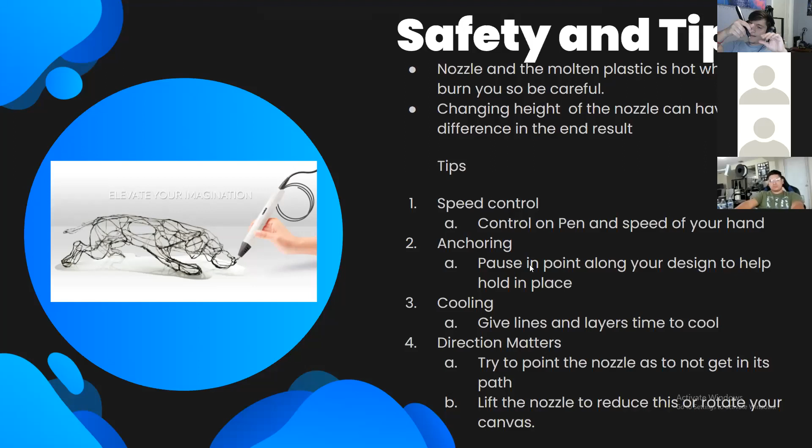Also, the direction of the pen matters, the way that you're writing it. If you start to write over the filament you're printing out or extruding, you're not going to get a good print out of that. Ways to avoid that are rotating the canvas you're drawing on, as well as keeping your pen a lot higher so it can extrude without falling or hitting all the other plastic you're basically extruding. Okay, let's practice.

So I'm going to change my cameras. Like I said, if you look at the chat, I sent you guys a Google Drive with a whole bunch of stencils. There's this really cool stencil there—what is it called—a Terra Sphericon. It's a really cool thing that you could do. So this is the portion of the workshop.